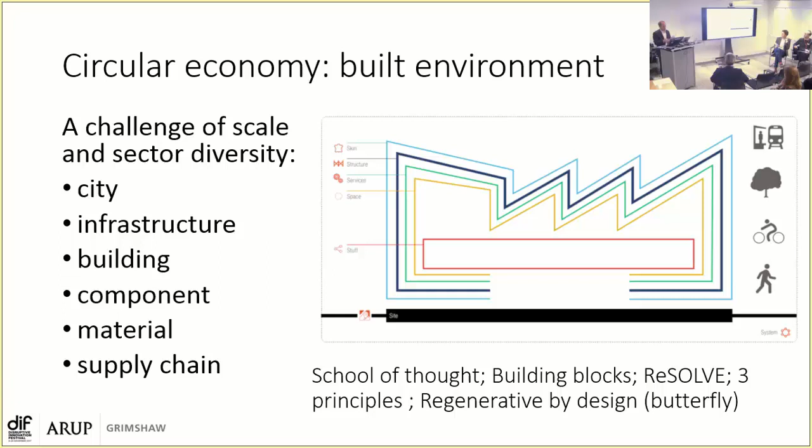That's all quite conceptual, and really what we wanted to do today was focus on that area we've already mentioned, aviation building facades, and hear from Andy and Alistair on what the design response is. That means things like the architecture, the material choice, how we combine things, how we use energy, resources, wastes, and so on. In terms of business, that's a really key part of what circular economy is all about.

It's about applying innovation and making more of our resources and generating more value out of that, for our economic systems, for the way we procure, the way we do business. Obviously, aviation is the context in which we're talking about today.

We've put together a whole set of slides, and we've tried to bring in examples that we ourselves have worked on. Now, by no means are they all aviation - in fact, there's quite a lot in here that aren't. But we've included them because they make the case, and we think they're quite transferable to those sorts of examples we see in terminal buildings and the facades we apply there.

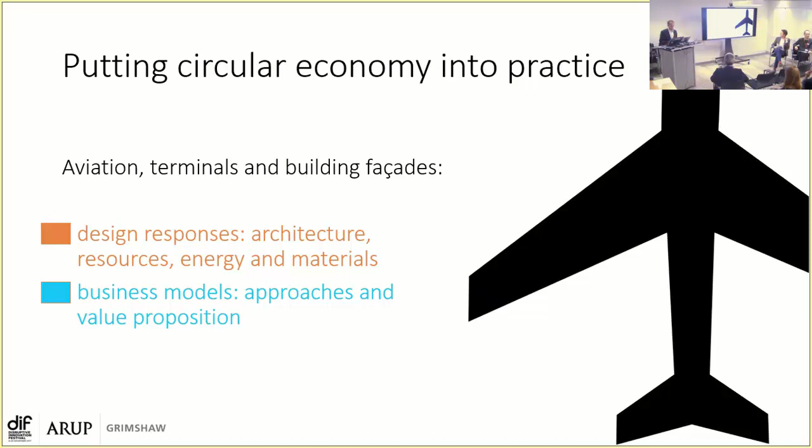So I talked a little bit a moment ago about a thought experiment. What did I mean by that? Well, we've got these concepts around circular economy, business models, and design responses. The way we wanted to extend our thinking in those areas was to set out a proposition of 5 future worlds and explore what the responses in those 2 areas would be, listening to Andy and Alistair. So those 5 future worlds are summarised on this slide.

We've got Castaway, Passive, DBOM - we've added a D in there to represent end of life and disassembly - the Universal Building or Terminal, and finally Scrap Heap Challenge. Those images give you a little bit of a taster, as do the titles.

Later on, I'll invite you to make your own interpretations of what they mean, having listened to our thoughts. Essentially, the plan for the next 20 minutes or so is for me to set a proposition around Castaway in the first instance, and then hear for a couple of minutes from Andy and Alistair as to what their thinking is around what that kind of world might mean in terms of applying circular economy to a building facade in an aviation context.

In the Castaway scenario, we think that you're going to really want long-lasting components, and ideally these will be reconfigurable according to your changing needs over time.

This is demonstrated quite well in a build project of ours, the Igus factory in Cologne, which uses a set of standardized reconfigurable panels. These panels can be upgraded over time, so cheaper solid panels can be replaced with more expensive glazed panels as the client can afford them. This project has been phased through 20 years and expanded through 7 phases, and these panels are completely interchangeable between all of the different phases.

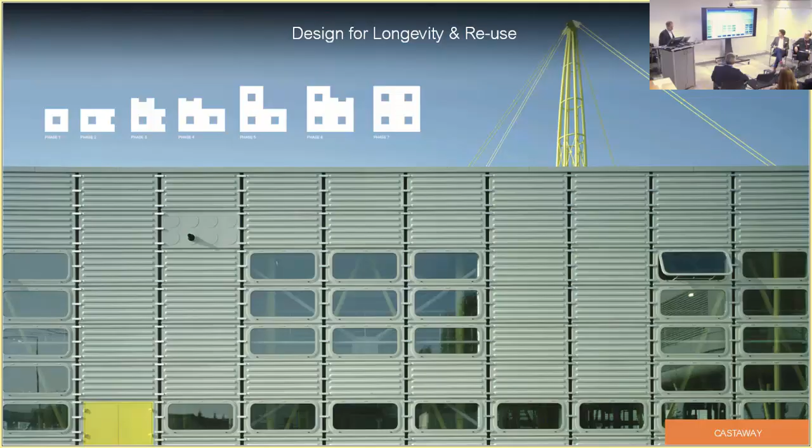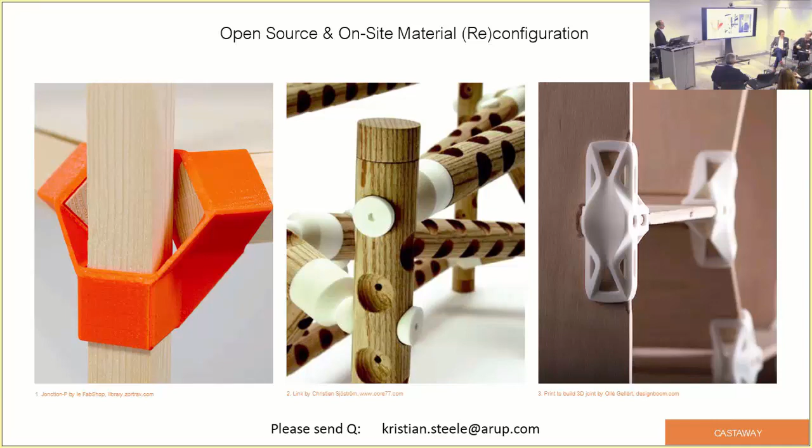In the Castaway scenario, you might also want to be able to print spare parts when you need them, and for this we might look towards advanced manufacturing. It's been a discussion held on quite a few of our recent projects, and there's growing interest in open source design and open source manufacture. If you think about the advancement of 3D printing technology over the years, it's conceivable that in the future we might have a raw material that's stored and continually configured and reconfigured according to the needs on site.

In terms of business model, the key question is how you make that work to pay back. So we see a framework agreement with a facade contractor, an agreement over perhaps 75 years, where you have standardisation and sharing of components across your airport. So I'm setting the perimeter outside the airport, assuming you're going to have multiple terminals growing, expanding, changing, being refurbished, and that standardisation allows a sharing of components.

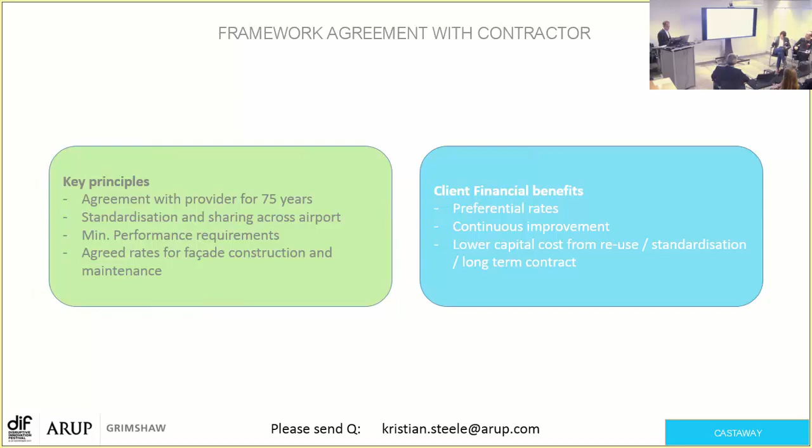How do you incentivise reuse rather than renew? It's quite clear that landfill charges have been increasing over time, depending on the type, and we imagine these trends to continue. We also think that if you can have a set of rates agreed at the beginning which favour reuse rather than renew, that design right at the start of that asset will bring high quality and ease of flexibility, very much in the terms that Andy discussed.

We think this will lead to lower capex. That standardisation and reuse means not only can you get continuous improvement, but you should get a lower capex for your objects, and hopefully also a lower OPEX, because you'll be reusing components stored across your various buildings. The key bit, like all of these, is this long-term contract to make sure there's really an incentive for people to consider those long periods and how things actually fit together and can be reconfigured.

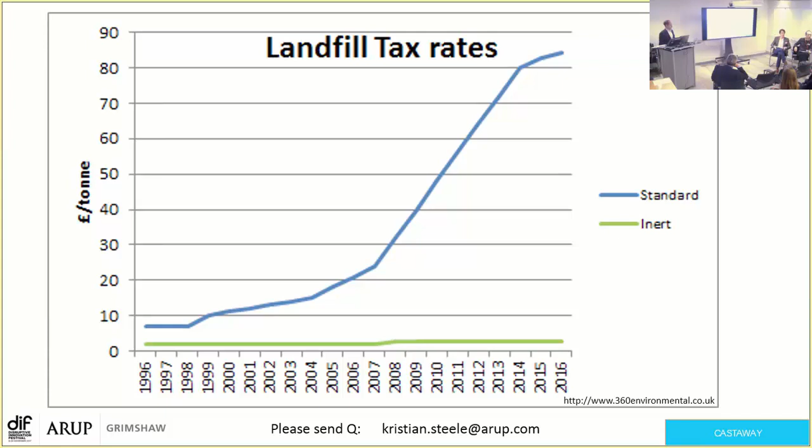The next world I invite you to imagine is that of passive systems with low energy requirement. We're not thinking too different from that, but is there a component about harvesting energy, harvesting the resources in the immediate surroundings of the terminal? Materials will need to be selected quite closely to enable that passive-based system to work successfully. So there's going to be a blend of high-tech or perhaps low-tech materials, certainly ones that subscribe to circular economy principles that enable successful recirculation back into a useful source at end of life.

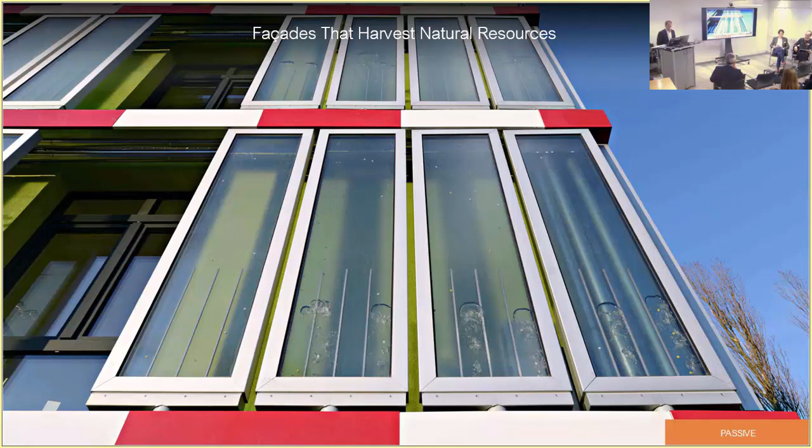So there's a quick description on passive, and Andy, maybe you can give us some thoughts. Yeah, in the passive world, you're going to need really hard-working, multifunctional facades that harvest natural resources. The image on screen is Arup's algae facade on the BIQ House in Hamburg, an innovative facade design which uses microalgae to create biomass and heat for energy in the building. Even more cleverly, it provides dynamic shading, so the more sunlight there is, the more algae grows, in turn reducing solar gains in the building.

In the passive world, we think you're also going to want to use materials that have a low environmental impact, and be using materials that are potentially available around you on site, in the ground, or grown, as in the previous example shown. This is a photo that I took last time I went to visit Eden Project.

This is a rammed earth wall in the visitor centre, actually a 45-metre length of rammed earth wall. Thinking about durability, Eden Project gets 1 million visitors a year. In 2010 they had flash floods, and this wall was unaffected by those, so it's extremely durable. Thinking about materials in this way, you also start to think about things like gabion walls, straw bale, and timber construction.

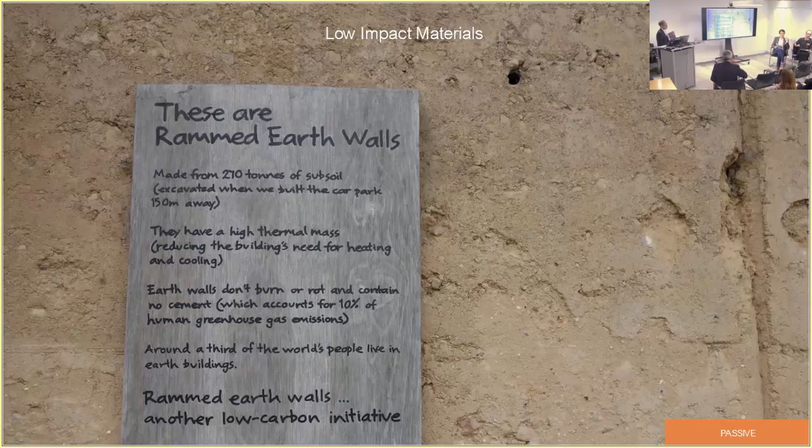I think in this world as well, you're going to want your facades to be recirculating what would have been waste flow, and certainly having energy recovery at the facades. In airports, we know there's a huge challenge around providing natural ventilation in the terminal buildings, so we might start to imagine air filtering facades.

This example you see on screen is a competition we did for Zagreb Airport. In this case, there's a roof plenum providing a low energy ventilation solution for the building, providing recirculation of the air and heat recovery in winter, and allowing exhaust of air in summer through stack effect.

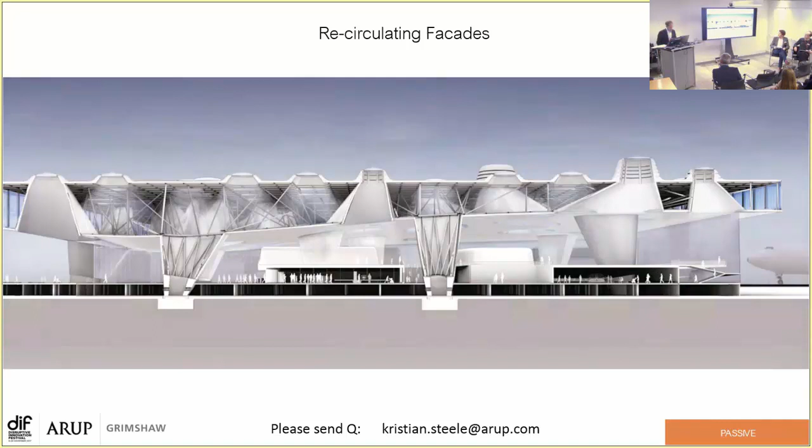So how do we incentivise the business approach? I see this as a USCO rather than an ESCO. Many of you have heard of energy services companies, whereas actually I'm thinking about utility services companies - a company that actually helps design and install that facade.

We all know the facade is a filter to that external world, as Andy discussed. It provides daylight, so it affects your lighting demand. It controls the U values, therefore your heating demand. So why shouldn't that utilities provider actually provide that element, the facade?

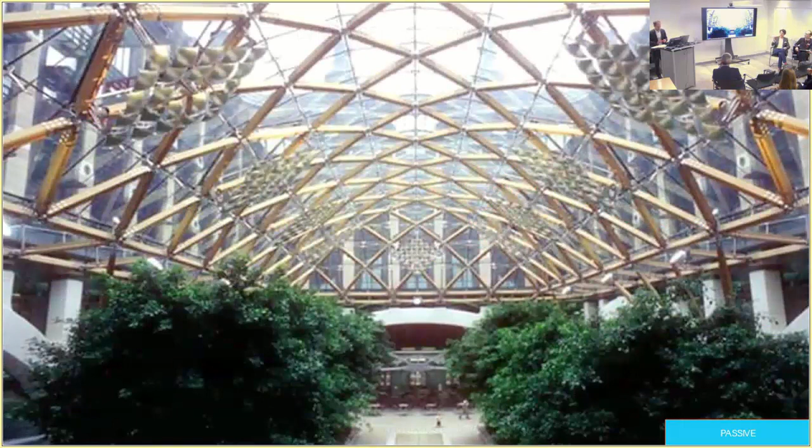You can incentivize both beating that performance - you set self-sufficiency as a minimum performance - but actually that tweaking of the facade over time, I think, is a great example like the building Portcullis House, where Richard was telling a story about the person in charge of running the building. It actually took about 3 or 4 years to get to the performance the building was designed for. So we designed it for a certain level, but as we all know, buildings are never used as we want.

But that tweaking, if you can incentivize it, and hopefully the utility service provider gets money back, perhaps selling some of those natural resources it receives, then you can create more efficient infrastructure, and hopefully reduce the cost the airport provider would pay in installing and paying for that facade. The maintenance of that asset needs to achieve a certain performance, and the OPEX of that facade is offset against the utility costs. So it's really a way of linking both energy and water and all those other elements we use to the provision of those services.

Thank you, Alistair. So the third world we're going to talk about is called DBOM plus D - design, build, operate, maintain, and we've added disassembly in there as well. In my mind, this links to, particularly, what is the entity that is going to embrace that sizable lifespan? Is it a joint venture of some form? What are the formal partnerships we're going to need to establish around the supply chain and around the operating airport?

Yeah, so I think in this scenario, whole life costs will be really important to the service provider, and we might see a preference for facades that maintain their performance over a long period, and the use of tried and tested details and materials, but certainly durable materials that maintain their visual appeal over a period of time.

And materials such as bronze and copper, as you see on the background image here, which is on the core building at Eden, and bronze, which was used on Portcullis House, which Alistair mentioned, have a higher initial cost, but they have an extremely long design life and extremely durable materials.

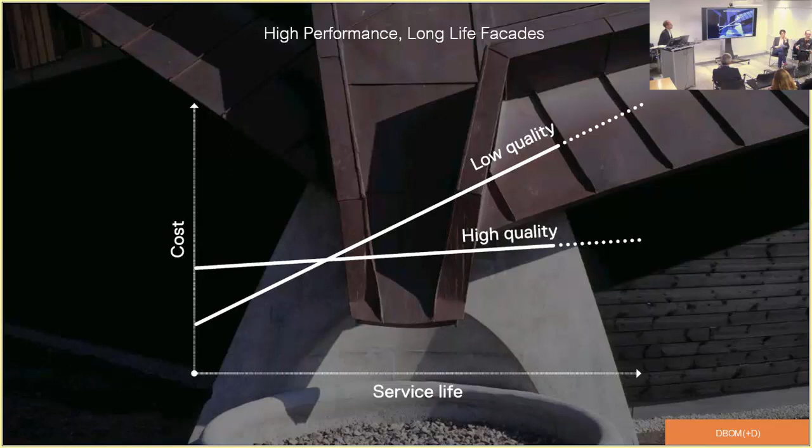We might also start to see facades that are generating income for the client or the service provider, and one way to achieve this would be through integrated advertising systems in the facade. There's lots of examples of this around London, where these are well used, where they have a good impact on the identity of the building, such as BFI, IMAX, and certainly in the work that we've done, thinking about the facade in this way completely changes the business case.

Because there's another economic consideration, and the challenge at airports being that you've also got that wayfinding requirement that you have to balance with the advertising.

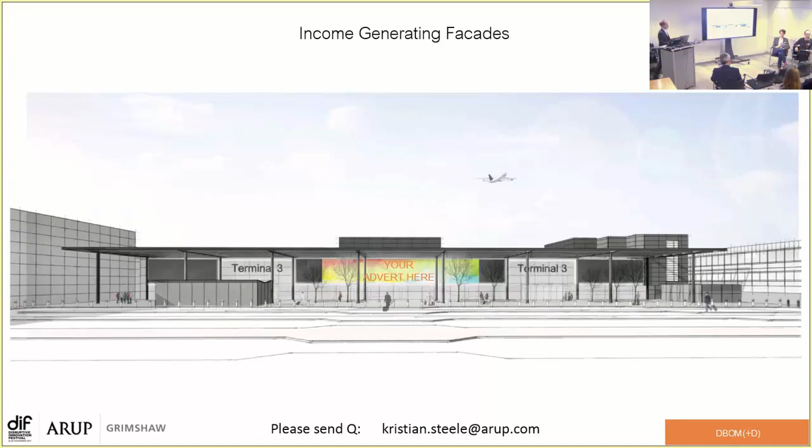Because of the nature of this world, we think facade performance, monitoring and maintenance will be really important, and it might lead to innovative inspection methods to flag up any issues very early, and potentially like low-cost, remote-controlled maintenance bots.

And certainly the facade would be designed to be able to accommodate hardware upgrades, so when performance falls below an acceptable level, the units could be replaced. So, for example, with screen resolution on the advertising screens, or the U values of the units, or with the advancement of technology and PV efficiency.

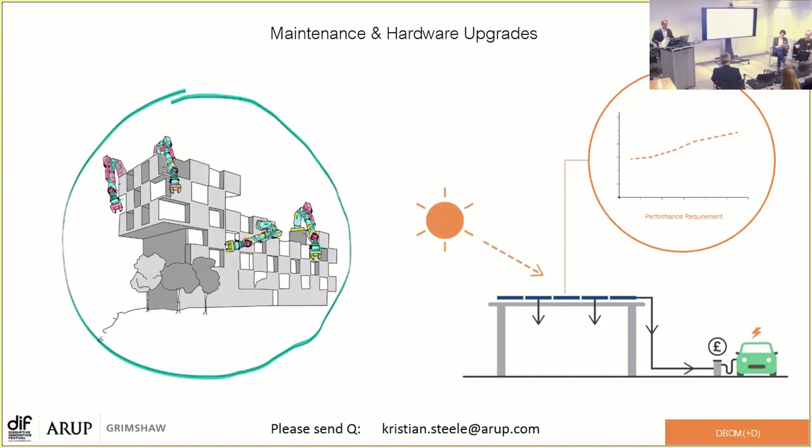And how do we see about this in a business model? I see it as the pay-per-pax approach, that actually you're only paying for your experience, the number of people that go through your airport, and that the airport is open. A lot of it might transpire to be a facade leasing approach, something we've talked about a lot in the industry, where you'd have a long-term contract with a facade contractor.

When I say long-term, the key thing we all know is that facades often get taken down after about 30 years when the glass goes. So it's making sure that the design actually takes it beyond there and gets them to think more than currently what's done.

And then there's also contractual performance, like that the airport is functioning 24/7, 365 days a year, and there'd be liquidated damages if it's not open. So you're only paying for your usage. Any lack of usage then penalises, which actually forces a great design at the beginning and this kind of ease of maintenance, maybe by robots, to reduce the cost of that during the life of the facade.

We also see the idea of the Internet of Things, that the facade is constantly monitored, that we know before a problem occurs that there's going to be an issue. A lot of you have probably heard about the Rolls-Royce approach to aero engines, where they are constantly monitoring their planes on a permanent basis to make sure those assets are used as hard as possible.

There shouldn't be surprises when they land, and we think the building should be exactly the same. With this kind of technology, we think that's very achievable.

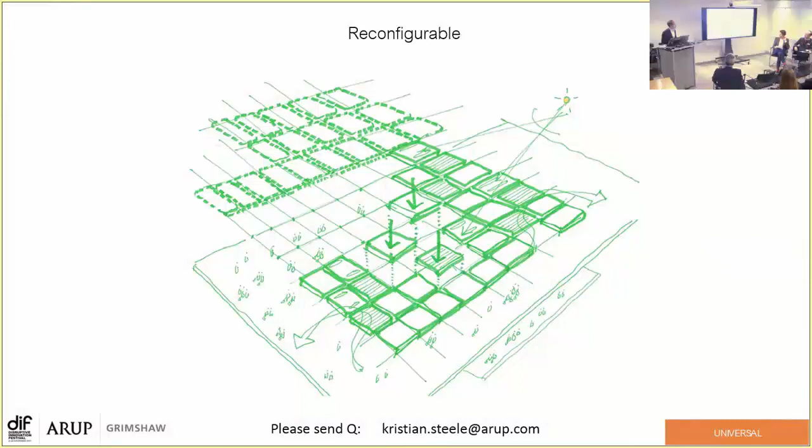Yeah, in our experience, the reconfiguration of a terminal building is really difficult due to vertical service risers going through the building, which limits flexibility. So this is a proposal we did recently, which looked at a series of service cassette modules that, similar to a factory, can be deployed as necessary according to the function going on inside.

So each of these units could either be a roof light, a solar panel, or a bit of green roof, and can change accordingly.

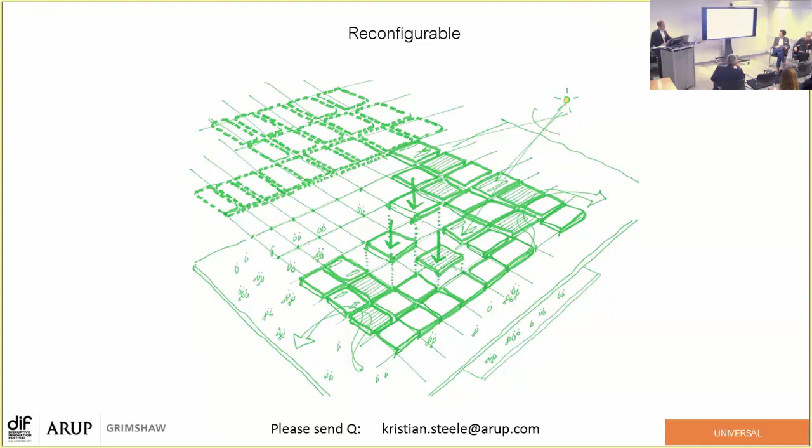This is a concept we came up with recently for Heathrow, and this came about through thinking about providing a really low energy passenger environment. It comprises a super lightweight, long span structure, and this is inherently highly flexible in terms of the internal environment it creates.

Terminal facilities and landside buildings are becoming much more lightweight and modular within the super enclosure. And crucially, in terms of terminal design, there's the idea of the terminal being able to be expanded incrementally according to passenger demand.

And like Kristian touched on, you have to imagine that a building could completely become a whole different function, might accommodate something else altogether. This is the Herman Miller factory, another Grimshaw building, and that idea of a loose fit approach to the design is really important.

On this building in particular, it was in the original client brief that this should be the case, and now we see that's really what that's meant, as this building is now being converted into an academic building. Bath Spa University is moving into this building and using it as their school for art and design. So it carries on a very long tradition of industrial buildings being converted into a whole range of other functions.

So our approach is, why don't you sell your airport? As airport providers, why do you need to own that envelope or the land it sits on? You might own that lightweight structure Andy talked about, and then inside sell off plots of land to Hilton, Gucci, Zara, or BA, maintaining that conditioned space, which can be reconfigurable in terms of height or width, allowing you to not just design per passenger, but design per demand. Hilton always fights to get that hotel very close to the terminal, but if you could enlarge or modify to allow other operators, there's potentially other revenue sources.

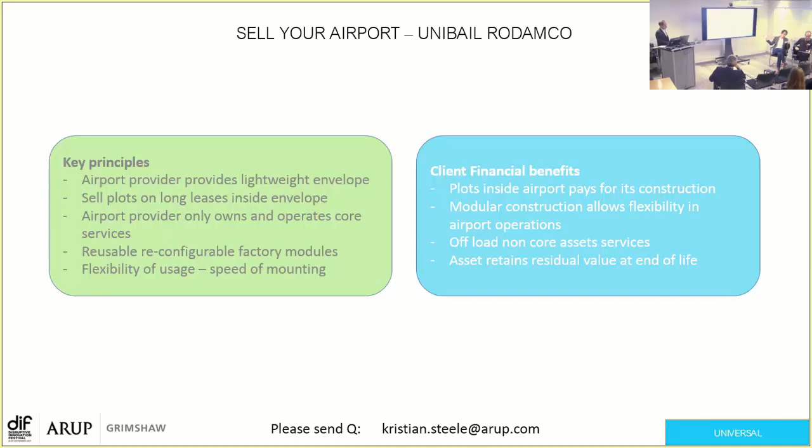Benefit of the airport provider is, firstly, you're not actually paying for the airport in the first place, and you could potentially get long leases which should help you fund future expansion. That modularity allows quick changes of usage.

We understand that security requirements have been changing quite significantly over the last 10 years, and this modular approach helps us be flexible in terms of those pressures. I guess the key point is focusing on what you're good on, and if you could turn the airport into a real estate market, that's a great opportunity.

Okay, so on to the last of our future worlds, possibly the most radical one. In this case, I want you to imagine a situation where new carries a real cost premium. New things cost a lot of money, so you think very carefully about buying new.

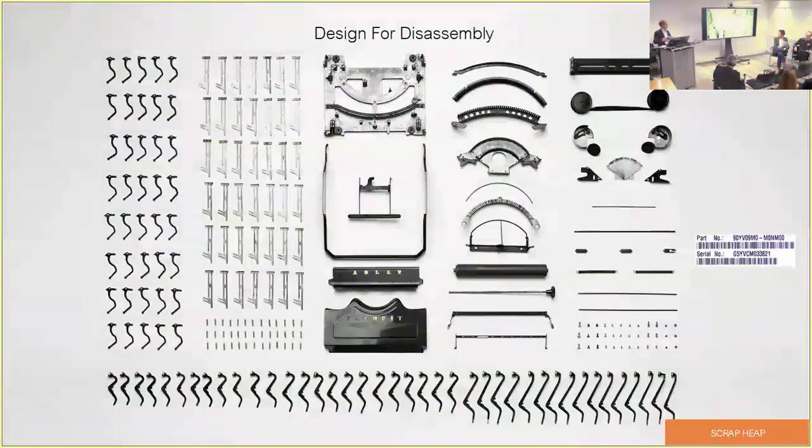But I think the biggest thing for this one will be it will radically change our approach to design. If you think about it, we'll be limited by the components available on the market, so we won't be able to go out and just source whatever we like. And architects will start to design buildings to be disassembled as much as they will for them to be assembled.

Every item in that building will need to be serialized so it can be found and itemized. Maybe we start to look at the software you're using now, like BIM platforms, and by using that we then have a searchable catalogue of materials, so we'll be able to see when components are becoming available and use them in our new buildings.

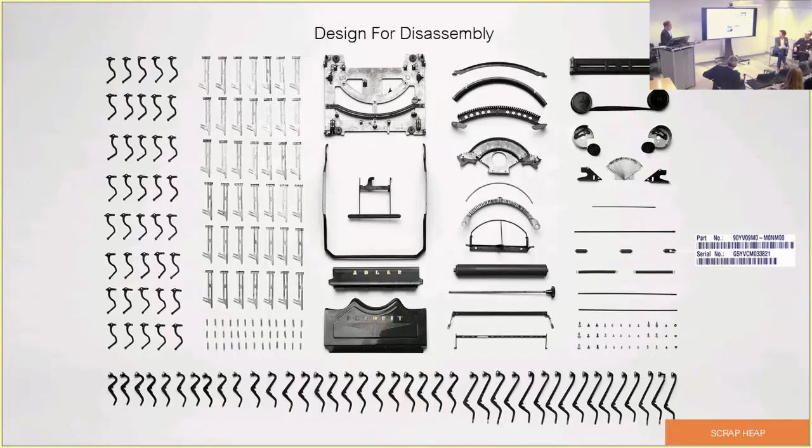So I see that as the eBay for facades. We design a facade right at the beginning so actually it can be demounted and resold. You're almost taking a different perspective on kind of usage.

You might have a material choice which is all about residual value. There were discussions earlier on about the use of copper and other materials, which are high-value materials that retain their value over time, rather than materials which are just thrown away and demolished.

We talked about standardisation. There's also a massive incentivization to maintain that facade, because if you want to sell off that component at its highest value, you want to make sure it's in mint condition.

I love the concept of that one careful owner, the idea of buying the car, and again this sensing of components and components telling stories. So we're already looking at how we can insert sensors inside the cavities of the facade to spot when that problem will occur. But if you can see the stress on the glues as well, then you know how much more life that component has.

Because we all know they never fail in one go, they fail one by one. So if you could understand how much more life is in there, you can understand much more about the value.

There's also a website which I found actually exists, called Enviromate, and there are a few websites that already do this for things like tiles and bricks that are coming off construction sites. These are often stuff that's left at the end, and then people are selling them on.